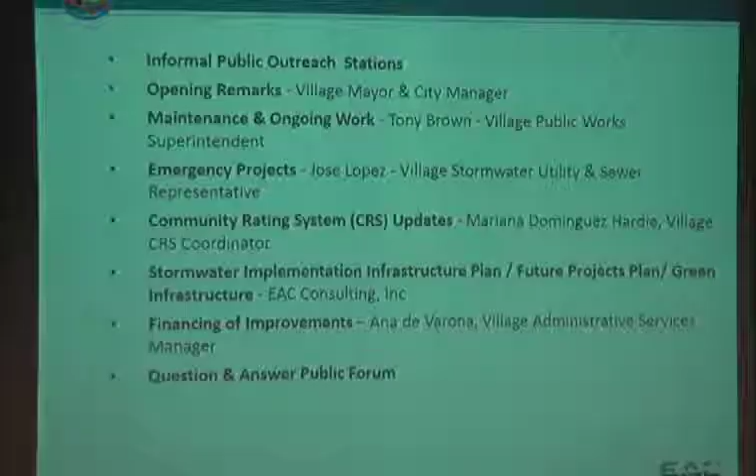I just want to discuss briefly with you some ongoing maintenance that we're doing to our drainage system and the entire village stormwater infrastructure. Our network of catch basins are interconnected, and at some point they either drain into a well or they exit through outfalls that go into the bay within the village stormwater infrastructure.

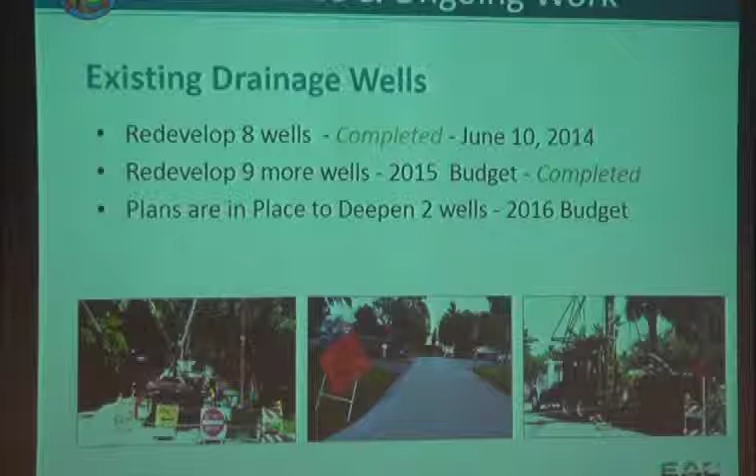In addition to the catch basins, we have a maintenance program that involves well cleaning, which is very critical because a lot of the rainwater during high intense rains goes into the wells, and then as an overflow, it also goes into the outfall. Last year we cleaned 8 wells, which was completed June 10th, 2014. This past year, we cleaned 9 more wells, which were also completed, and we will continue to clean wells every year. We also plan to deepen 2 wells, 3A and 3B, in the 2016 budget.

In addition to well cleaning, we also reline drainage pipes that have corrosion, infiltration, or joint separation. These photos here are pipe photos from the Ocean Lane Drive pipelining project. As you can see, the first photo there, let me see if I can get this pointer. Let me use this here. All right.

This here is a pipe on Ocean Lane Drive that had some corrosion, and there was also some water infiltration just from the groundwater. When this happens, it fills up our wet wells in our pump stations, and causes the pumps to come on prematurely to try to pump this type of water out. This is like a false reading, because this is not really rainwater, this is groundwater.

I just want to point out here what the pipe lining product is. It's a 3-part resin on a felt sheet. What happens is the pipe lining contractor pushes that through with steam, and the steam activates the resin, and it hardens that felt into what you see there. And that there will last forever.

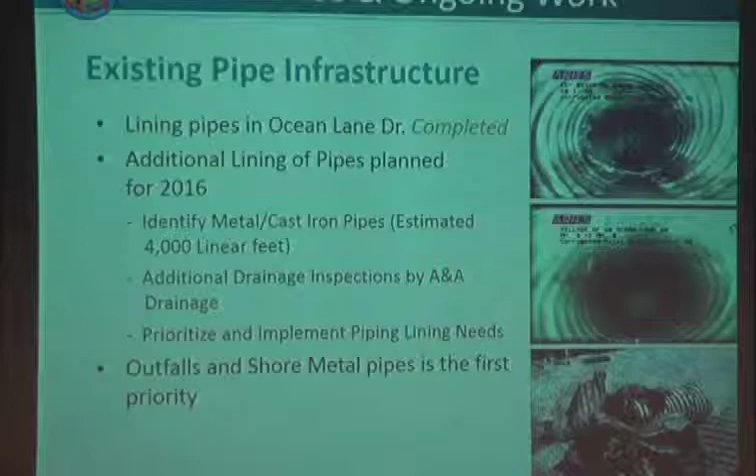And when that particular lining is put in, the existing external pipe can actually corrode and just disintegrate, and that lining will stay intact for hundreds of years.

So this is just another maintenance that we are performing on all of our pipes. Our first priority this year will be to line all the outfalls, which are corrugated metal pipes. Since they're so close to the salt water, we know that there's going to be some corrosion, so we're going to line those first this year.

After heavy rain events, inspections are performed to document flooding. The photos in this slide represent Sonesta Drive, and we've documented that there's water coming over from the adjacent property, which is Key Colony. They are working with us to inspect their wells and get them clean, because they must be able to maintain their water and not dump this water off into Sonesta Drive.

We have pumps that are connected to drains here, and after 2 hours or so, it drains it down. But if we didn't have this water coming over, our pumps would not have to work so hard. So we are working with them to secure this wall and to stop this water from coming over, by helping them discuss redeveloping their wells within their property limits.

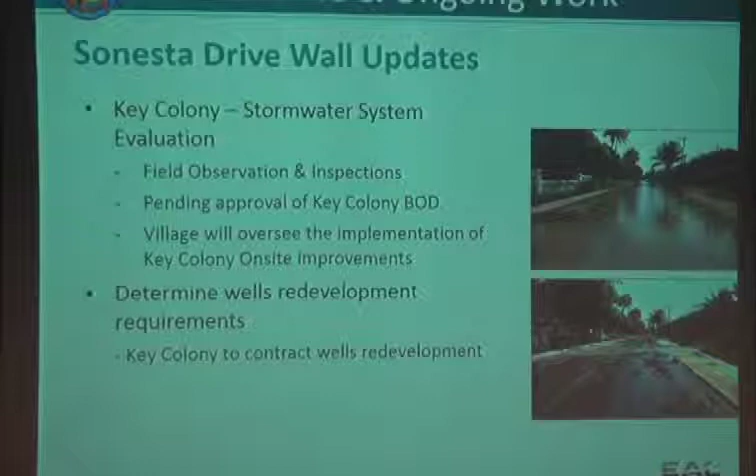Other improvements consist of the installation of a SCADA system at all pump stations. SCADA stands for Supervisory Control and Data Acquisition.

In the past, if our pumps were not operating properly, we would basically get a call from the police department saying there's a lot of flooding out here, something's wrong, and then I would have to wake up, drive over, and check the pumps. Now, this particular system will call me at 3 a.m., 2 a.m., whenever the pumps aren't working.

I think last week, or 2 weeks ago, the wet well alarm had sounded because we had a lot of rain and high tides. And the pump called me, and my wife was like, who is this calling you this time of night? It's a female voice, and it just said the wet well level is high. Pump 1 is working fine, and pump 2 is working fine also. So I said, see honey, it's just the pump station calling you. So, you know, I got a pass on that.

So this is just a proactive approach to ensuring that we are on top of the drainage situation and the flooding that we have here in the village.

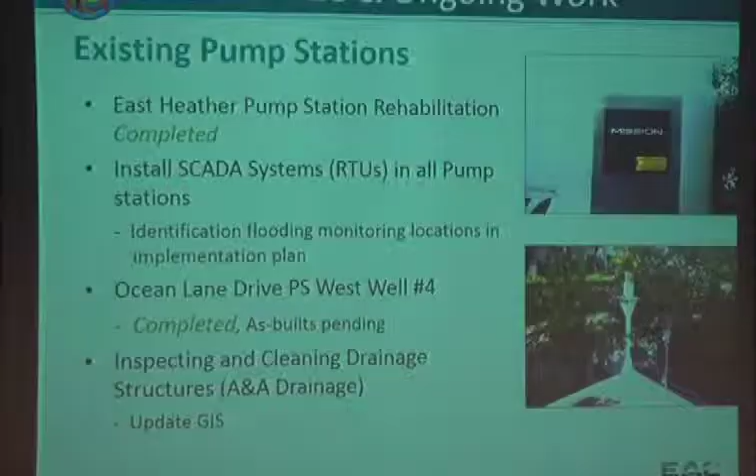That ends my short presentation, and I would like to introduce our stormwater owner's representative, engineer, Mr. Jose Lopez, who will be discussing the emergency projects that we have coming. Thank you.

Well, in February of 2014, we had our first workshop. We discussed the plans and the things we were going to do. One of the objectives was to do the emergency things we recognized as more critical right away, not wait for a complete planning process.

And that's what we are going to review here. We had identified several projects. One is the Harbor Point outfall enlargement, which we've been negotiating an easement for, so we haven't been able to do that work. But we have done the 260 Harbor Drive work. The outfall was relocated and redone.

This was caused by these outfalls collapsing as a result of corrosion of the metal pipes. And when I mean collapse, I mean collapse, the whole thing. I remember one of the property owners said it's a hole like that you could put a small Volkswagen in it, and it was. It was just that bad. But now we have a new line in 260 Harbor Drive, and we have a new line in 398 Harbor Drive.

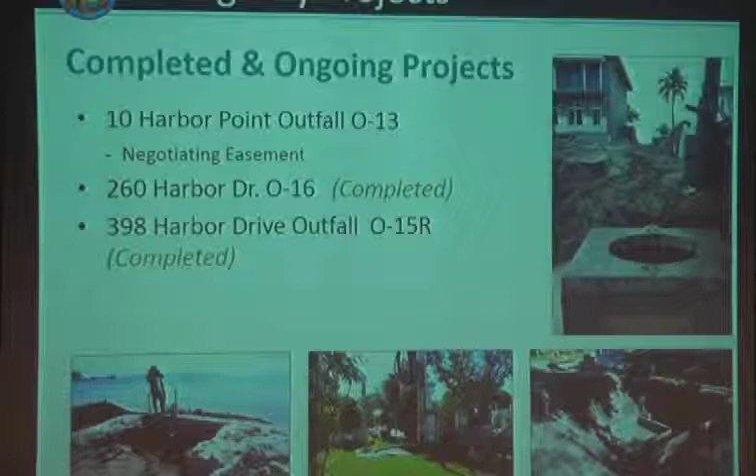They all serve the same basin, which gets a lot of flooding at West Heather, one of the lowest spots in the village, around 300 West Heather. So this was completed. Both works were completed. In fact, for the 398, we were able to get a grant for it. So it's work that has been done.

The other emergency work that was completed, done in the summer of this year, was improvements in the school area, the K-8 area. A lot of flooding has happened there, and because it's not only a flooding issue but a kids' safety issue, we wanted to have it in the emergency work, and this work has been completed. Two new wells were added to the area, and a backflow preventer was also installed. The problem is not totally solved, but we've already done some work on it.

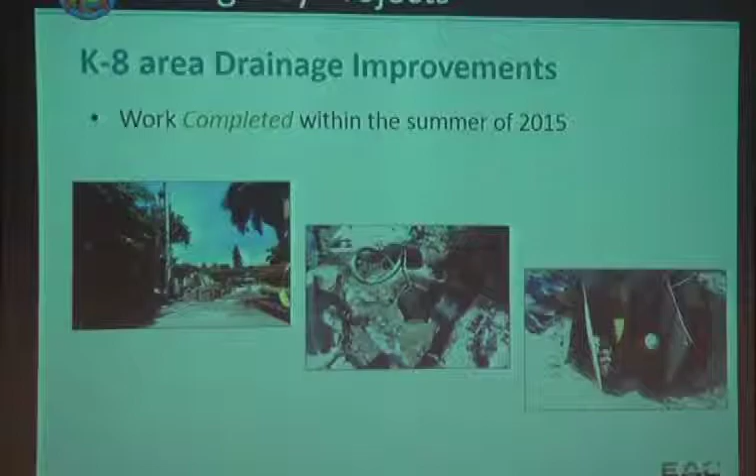And now the next presentation will be Mariana on the CRS updates.

Thank you, Jose. I'd like to start by defining what CRS is. It stands for Community Rating System. It's a voluntary program that the village chooses to participate in. We must meet a series of requirements, and in doing so, it benefits the community by providing a 15% discount on all flood insurance policies, commercial and residential, throughout the village.

One of the requirements of CRS is to make you aware and remind you that we are in a repetitive flood area, meaning we choose to live in a community with low elevations subject to flood. Drainage is subject to tides. I'm probably going to be the least liked person here today.

The first step in avoiding flooding is staging water in the streets and swales. Flooding, for the purpose of this presentation, means avoiding water entering your residence and affecting your private property. When there's a high tide, simply the water has nowhere to go. We just have to wait for the tide to change so water starts draining.

Jose and Tony did a wonderful job telling you all the projects that we have done. And again, I'm here to highlight that this will alleviate and mitigate a rainfall event, but any significant surges or storms, it won't be helpful in that situation. That's why we are in a mandatory evacuation zone when a storm does arise.

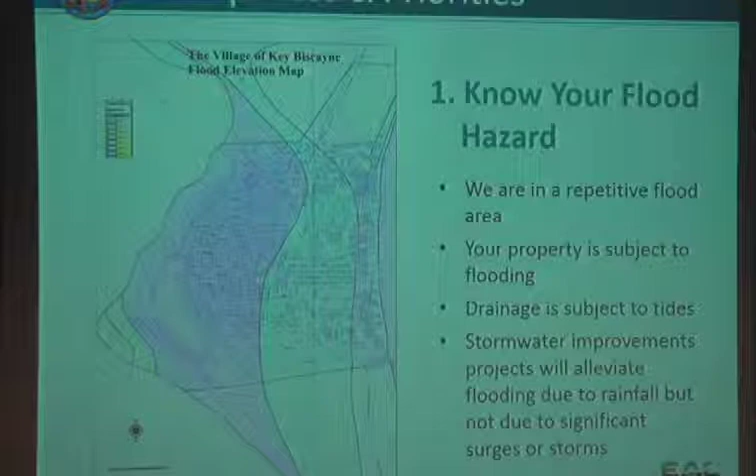Protect your property. We live in a flood zone. Again, you are required to have insurance. Even if you rent, we promote the importance of acquiring insurance. Most importantly, protect yourself. Turn around, don't drown. I learned that 6 inches of running water is sufficient to make you fall, and 2 feet will take your vehicle, even an SUV.

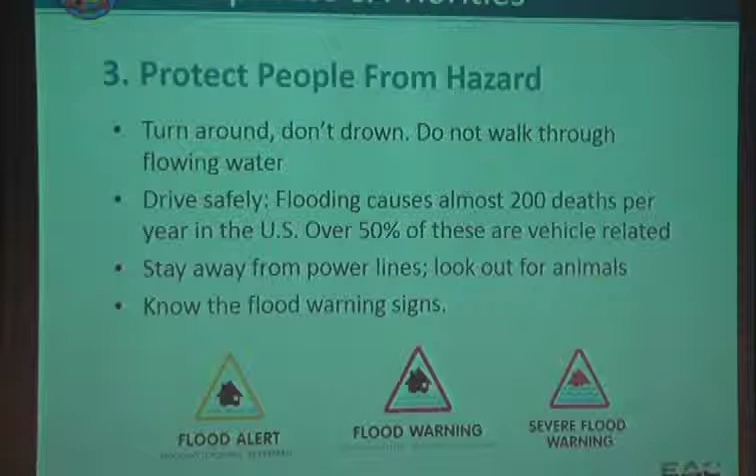So the purpose of this slide is just to be informed, be aware. Following are just simple tips on how to protect your property. And I must also direct you to a link, as a requirement of CRS, where you could obtain some information on grants. These grants offered are mainly to demolish and build a higher home above base flood elevation. Told you I was not going to be the most liked person here today.

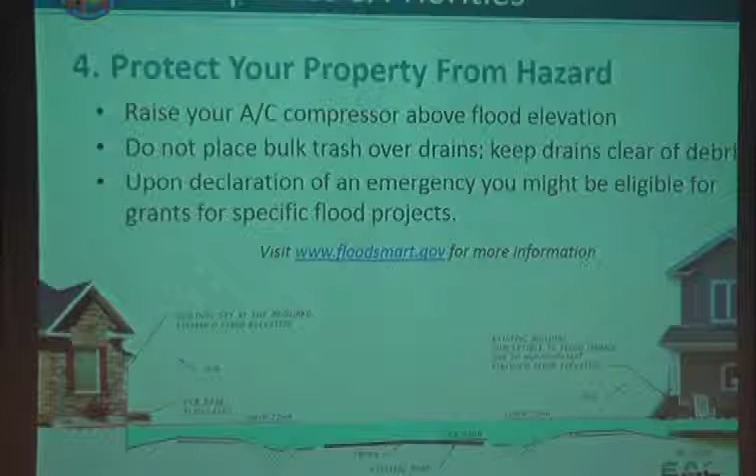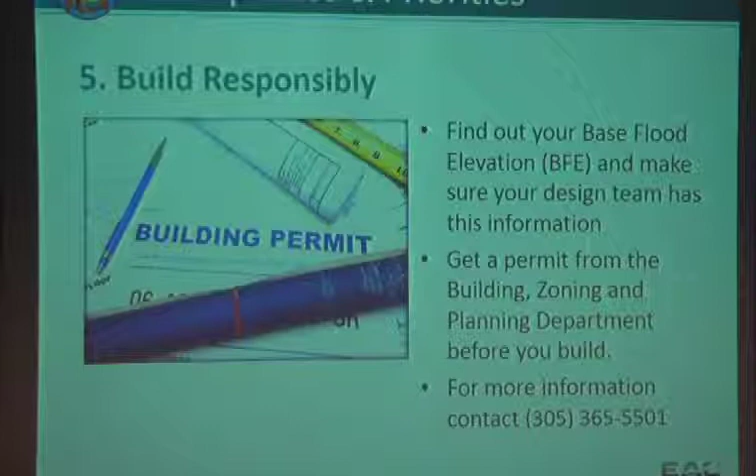Build responsibly by obtaining a permit. You're ensuring that you're meeting the code, and the work being done in your property will minimize any flooding.

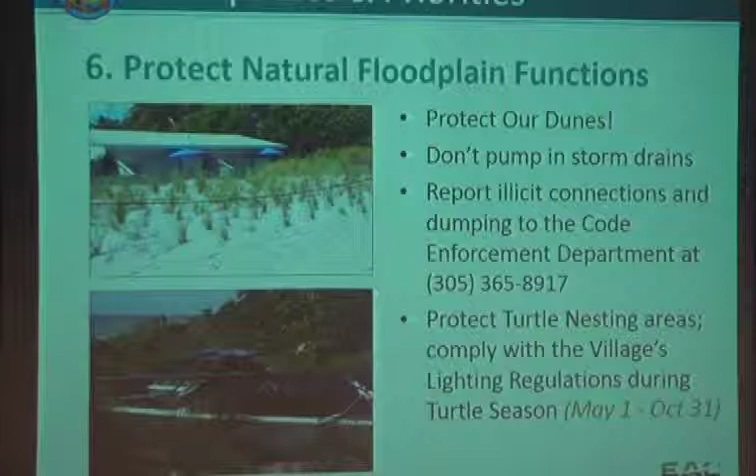With this, I conclude my presentation, and I leave you in good hands with Mike Adelphi. He is an engineer with EAC, orchestrating this workshop. Thank you. Thank you very much, Mariana.

I'm Mike Adifi, like Mariana said. I'm with EAC Consulting. I'm privileged to be the project manager on this great initiative that the village is embarking on. Really excited, but we're also grateful for the opportunity that the village has given us and has entrusted in us as a consultant team to handle this project.

Even though we're the consultants, I'll be remiss if I fail to mention the level of support and cooperation we have received from the village leadership, the mayor, the village manager, the stormwater representative, and all of public works staff. It's been very, very good. When you have a support team working with you on such initiatives, it makes things easy. So we're truly grateful for the opportunity, and you guys keep doing it.

You're doing a great job for the village, and some of the great work you've been doing that hasn't been noticed will start to get noticed with some of these improvements we're looking at. Like the mayor and the manager said, this is another step in the journey to start to effect the right infrastructure improvements village-wide.

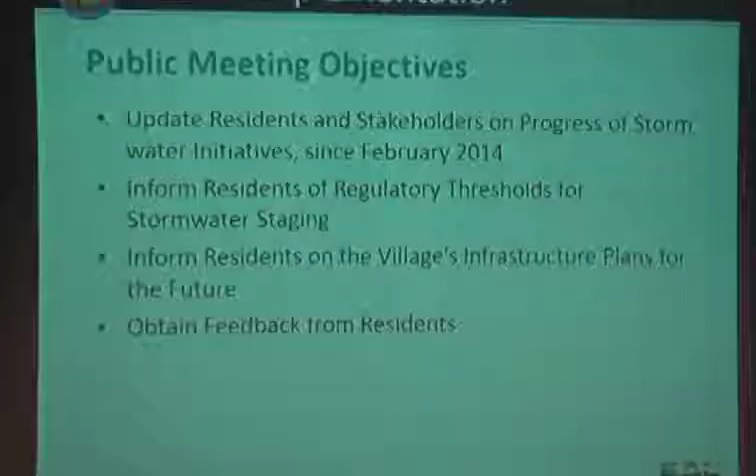This is the team. It's not EAC Consulting—it's the village, the residents, the leadership of the village, and us. We're going to work on this together, and we're going to successfully accomplish the goals that have been laid out by the leadership of the village.

So we've looked at this—there's no plan without a schedule. We can come up with the best plans, the most elaborate plans and schemes, but there has to be a timing to it. We've looked at the available budget, looked at the projects that are needed, and we've come up with a sensible plan over a time period that allows these improvements to be designed, permitted by the regulatory agencies, and constructed and put into service.

And so this is what we have. We have a starting date on this. Even though we've been working prior to this, we started this snapshot of the schedule by illustrating today's meeting, and then some of the other milestones we hope to accomplish through the process.

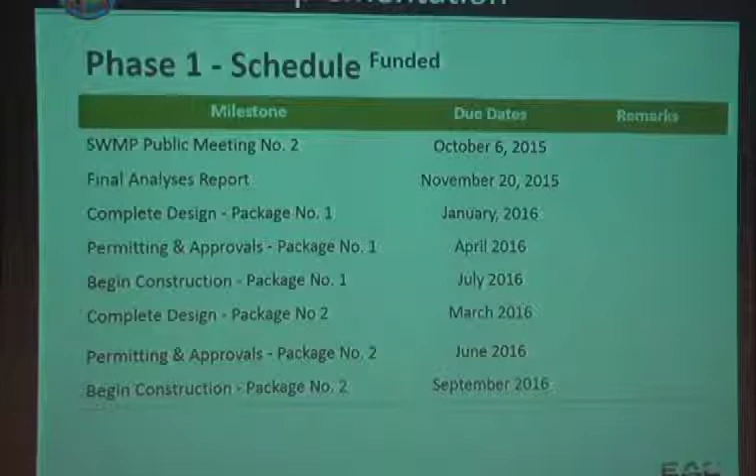There are two tables: a phase 1 schedule, as well as a phase 2 schedule, which is where future funding will be needed. There's some funding available right now. Now we're going to stretch the funding and accomplish as much as we can with that. But I know that the leadership of the village as well as the staff are looking at other alternatives and options to bring in needed funding to get some of the other improvements implemented.

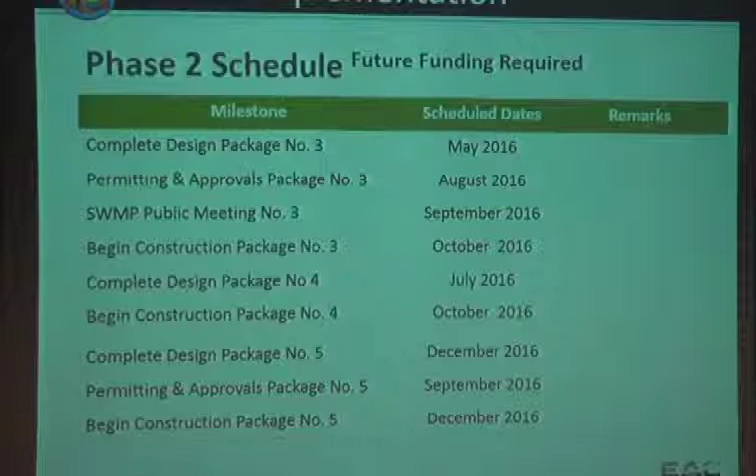I'm the leader of the team, but I'm surrounded by a great crop of professionals. I tell Jose when I come to the meetings that my guys have sent me to say things to you, but a lot of guys are working behind the scene, and some of them are here today. I want to recognize some of them, and they'll speak to you about some of the things we've been looking at.

First, I want to bring on Cesar Burgess. Cesar has been very much involved in the hydraulic analysis and modeling that has gone through this process, and he'll be able to share more insight on some of the things that we've done. Cesar.

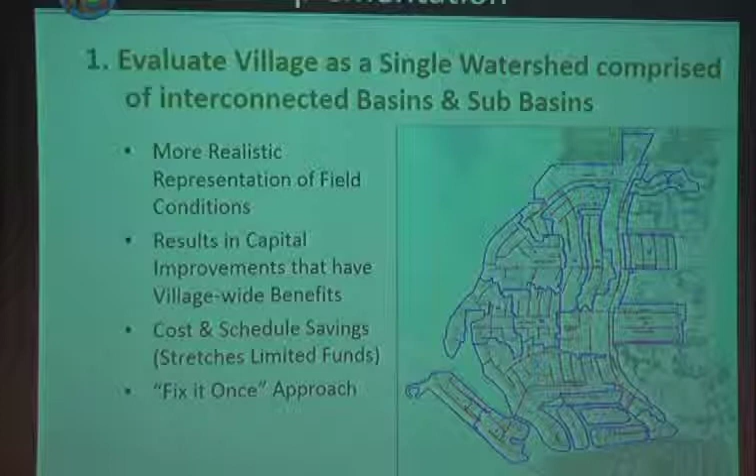Cesar Borges, Lucis Corporation. My area of expertise is stormwater management and modeling and analyzing systems to come up with a solution for the village.

So basically, what we started out with was the village had a master plan created in 2011, where they created a model, a mathematical model that represents the city systems, the area, so that you can analyze what's happening in the real world, but in a computer model. Since 2011, the village has been actively maintaining their systems, inspecting their systems, improving on the data collected in-house. So our process was: they have all this new data, let's go ahead and implement it into the model so we can get a more realistic representation of what's going on.

Part of this process involved updating certain components within the model so that we can get what's actively out there, what's been verified by hand, by feet on the ground, and have that implemented into the model. In addition, we incorporated some projects the village has completed since the 2011 completion of the Stormwater Master Plan. That's important because certain items weren't represented in the previous model since they were implemented after the plan was completed. So that's getting it up to date, getting our existing condition.

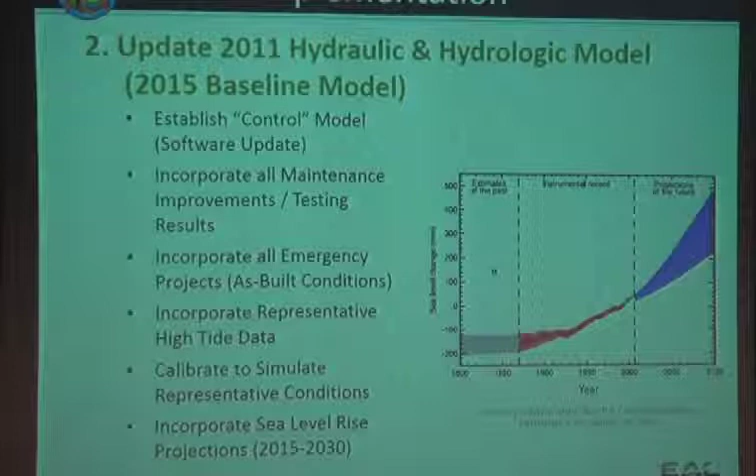In addition, we were looking at sea level rise, because it's a very hot topic. The village is very susceptible to sea level rise. It's something that cannot be ignored. We have actively implemented that component into our model, so that we can address future needs, not only today's needs but future needs of the village, so that we don't ignore something that might happen 10, 15 years down the road. You want to plan ahead. So sea level rise is one of those things, and they're projected up to about the year 2030.

With respect to our analysis, we looked at the overall staging of water on the village roadways and green areas, and so on. When you look at the model, the village has very low topographic elevations. What do I mean by that? The elevation of the roadway, the grass, the adjacent areas - it's very low relative to the tide, where all these waters are outfalling to. That's a bad thing. Without that elevation, water tends to stack up and end up as flooding on your roadways. And that means you need that much more force to push that water off the roadways, through the system, and out into the outfalls.

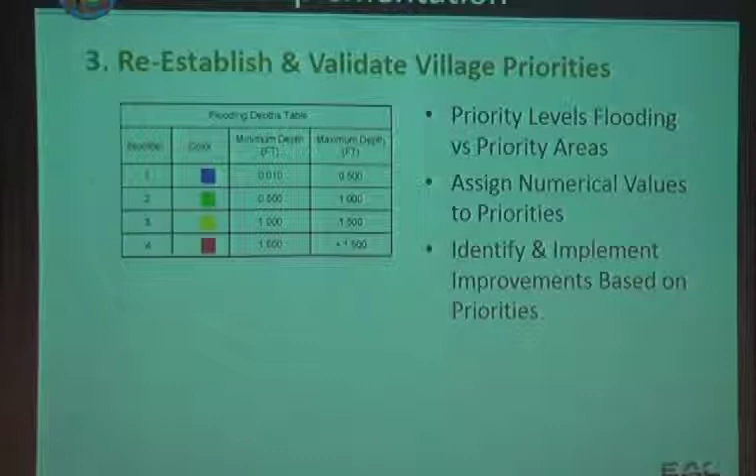So, wrapping this up as far as the hydraulic analysis: we looked at sea level rise, we looked at the outfalls, and the most recent data we have on the outfalls, updating that into the model. The new infrastructure has been put in, the items have been verified. We incorporated all of that into the model, as well as in our analysis for future conditions, where we put in proposed stormwater infrastructure to help alleviate the problems the village has with regards to flooding and staging.

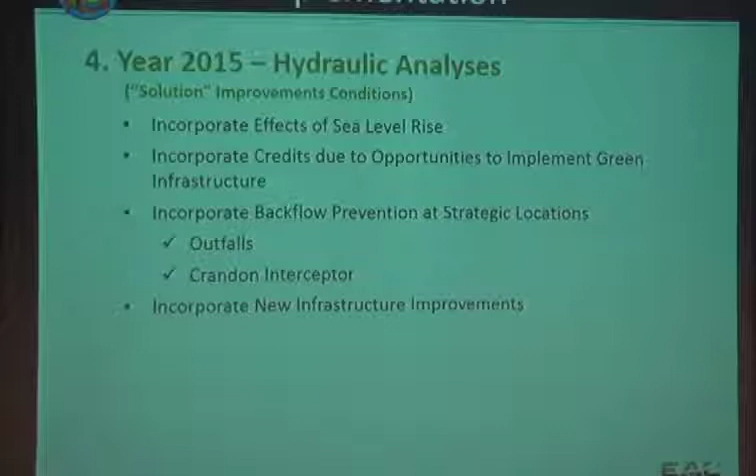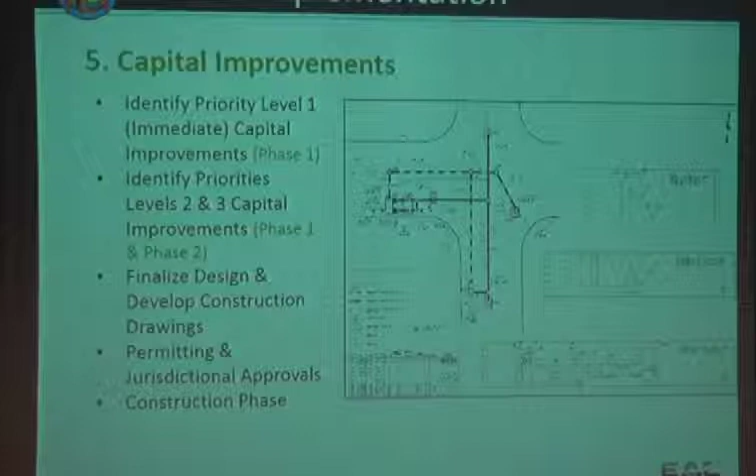So part of that included the priority level 1 and priority level 2 stormwater infrastructure improvements that one of my colleagues will be discussing a little bit later. We have to look at those as if they're finalized, so that we can assess their effectiveness on dealing with the stormwater management issues that are present on the island.

Now, in the media, recently, I don't know if you guys have heard that South Carolina had their 1,000-year event. It's kind of a misnomer in a way. People get it confused. They say that's something that happens only once in 1,000 years. It's not really once in 1,000 years. It's more of a probability. It's saying it has a 0.1% chance of happening. Like, for example, a 100-year event has a 1% chance of happening.

A 10-year event has a 10% chance of happening. A 5-year event has a 20% chance of happening. It's all percentage based. Now, with respect to the area that we're in, South Florida, it rains a lot. Our systems are taxed by the smallest rainfall event, but even a 5-year event, something that has a 20% probability of happening, you're talking about 8 inches of rain over a 72-hour period. That's a significant amount of rain.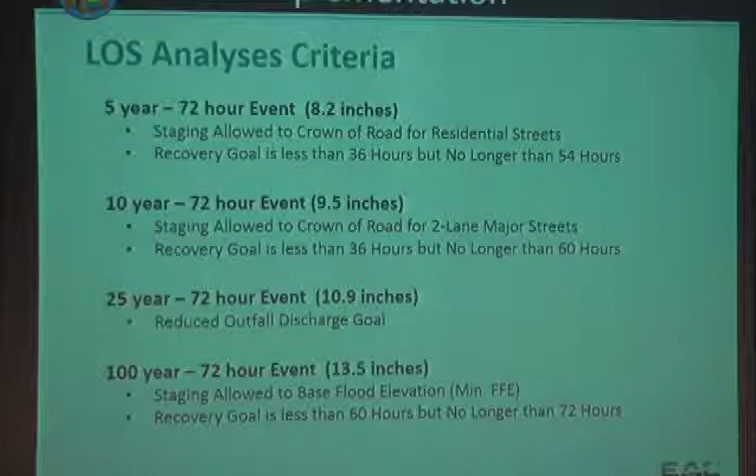So how do we design our systems? Well, we intentionally utilize swales, some of the roadway, the grassy areas to provide storage for stormwater so that the water doesn't go into your homes, which is the most important property that we have. You don't want it inside the home. It's okay if the grass gets flooded. It might flood for a day in an extreme event. But our intention is, when you have staging of water on these designed areas, that the water recedes in a short amount of time. So that's the way we design our system.

We design them to have some storage on the roadway, storage within the system, utilizing outfalls, pump stations, and wells, and not affecting the homes. And having those staged waters, those flooded waters, receding in a short period of time, so that you guys can go back to your normal daily lives. And that's the intent of the stormwater management systems.

And if you look at the slide over here, you see where it has the 100-year, 72-hour storm. That's the peak elevation that we want those waters to stage on the common areas. It can go right up to the finished floor elevation, but we don't want it to pass that elevation and go into your homes. That's the way the systems are designed. With respect to the smaller event storms, we're usually going to about the crown of road, and that's what we utilize as a break point, saying we don't want the stage to go above that. So we want to design our systems to the 5, maybe the 10-year events.

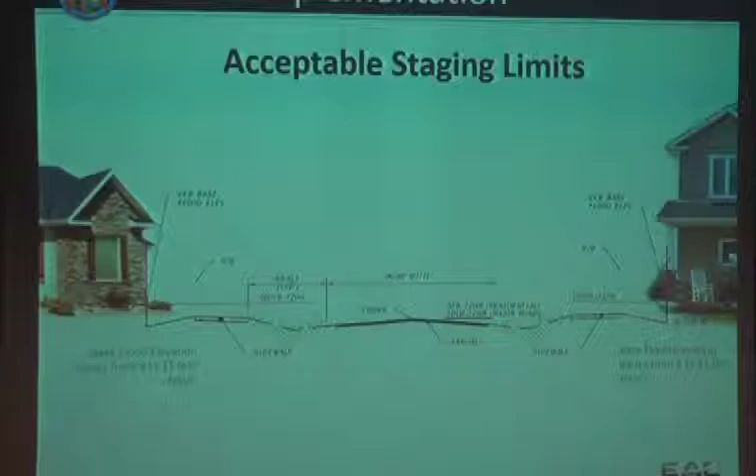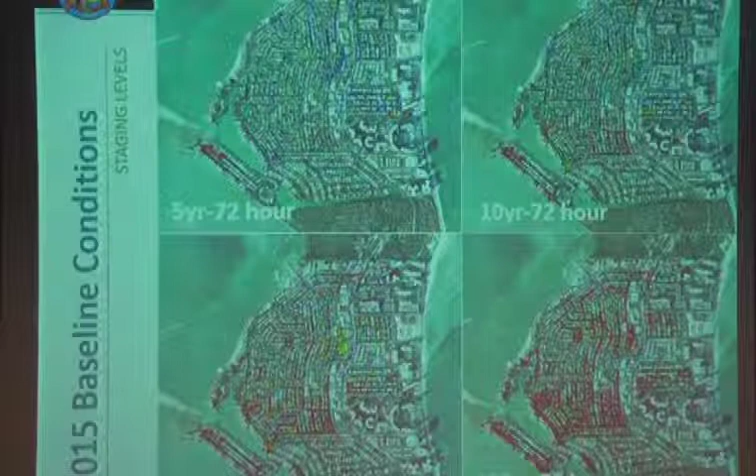And here's a slide, and you'll see it on the boards more closely, where you can see how the different storm events with their respective rainfall amounts result in additional flooding. Notice the reds in here. Now you start seeing the reds expanding in area. And as you get to the 100-year event, there's a lot of red, but just because there's a lot of red doesn't mean that it's necessarily going into the homes. If your home's built based off of the base flood elevation in an area, the inside of your home should be safe. It's just that the system, which is the whole island as a whole, is utilizing the areas for storage. So with that, I'd like to pass it on to Mark Kuntz.

Thank you, Cesar. Good evening, everybody. My name is Mark Kuntz. I'm a senior stormwater engineer. I work for EAC. I've been tasked with helping Mike arrive at some drainage solutions to some of the problems that you folks are experiencing here in the village.

What I wanted to do is go through a little bit of a summary of some of the different alternatives that emerged from the study that Cesar was talking about before. We've lumped the different improvements into different tiers, Tier 1 being the first level of protection that we're looking to implement.

Essentially, as Cesar mentioned, our greatest enemy is the ocean. We're working very diligently on solutions to help move stormwater off of the island and into the ocean. And clearly, in times like we've experienced the last month, which is the equinox high tide, you can see that you don't even have to worry about stormwater flooding the roadways. The ocean does a good enough job of it on its own.

So one of the first measures that we're investigating, and it's used pretty widely, is what they call backflow prevention devices. They're like little gates that we put on outfall pipes at the end of the stormwater systems to control the ocean water from coming in. In other words, the pressure of the stormwater, the water that comes on the roadway from the rain, will actually push the water out, but it will limit the amount of ocean water coming back in.

We feel that this Tier 1 approach is really the greatest solution that's going to bring the highest amount of relief for the lowest amount of money. There are currently 20 outfalls within the city and 3 additional outfalls into the Crandon Boulevard system. There are backflow prevention devices in place there, but for the vast majority of outfalls, there aren't backflow prevention devices yet. So our first recommendation is to construct the backflow prevention devices, at an estimated cost of about $500,000.

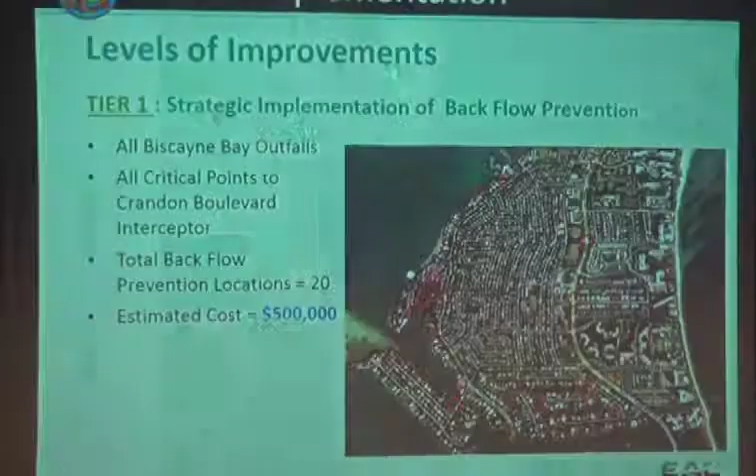Yeah, as this graphic demonstrates, and for those who can't see it clearly, afterwards you can take a look at the boards. The boards are essentially a duplicate of what you're looking at on the screen, but you can see the kind of relief that we anticipate in the reduction of red areas from just the installation of the backflow devices alone, without any other improvements, such as upsizing pipes, increasing the number of wells, or increasing pumps.

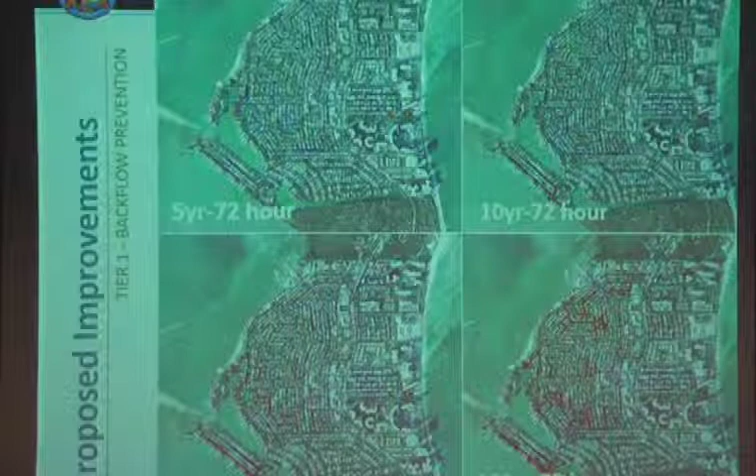After Tier 1, that brings us to Tier 2, which is addressing the flooding in the lower lying areas located within the village. Typically, this occurs on the eastern side of the key: Holiday Colony, area number 1, basin number 11, which is an area located south of Holiday Colony, and Ocean Lane Drive, which is located, of course, to the very north of the key.

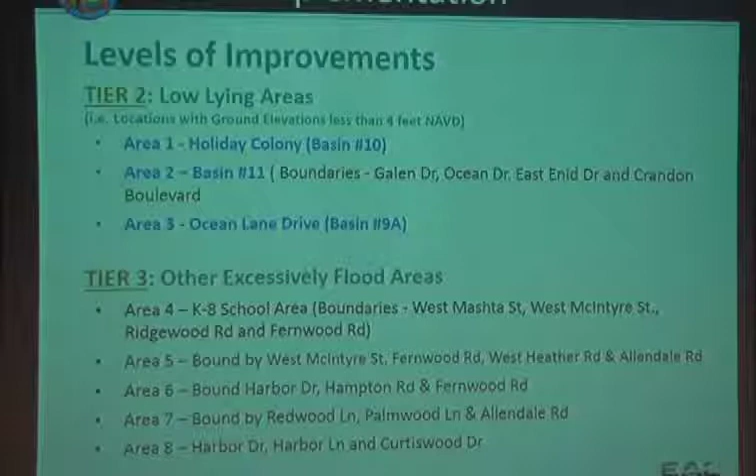I'll talk a little bit about what the proposed improvements are for those areas. Tier 2 essentially takes advantage of the funding that we know is available for the village right now. Tier 3 are improvements that we're going to investigate, but will likely have to be implemented as part of future funding. As I mentioned, I want to look specifically at each of the individual areas, the first of which is Holiday Colony.

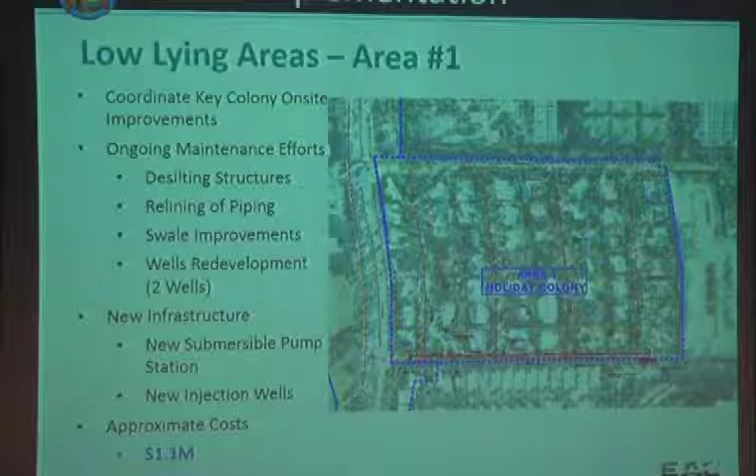Obviously, any stormwater solution involves ongoing maintenance. Tony spoke to you at length about the types of improvements that the village is looking at right now and actually implementing, including pipelining and the construction of additional wells. Those efforts will continue and are part of any ongoing solution. In addition, in this particular area, we're looking at the construction of a new submersible pump.

There is an existing pump station located in this basin. It's not working efficiently, so in order to address that, we're looking at the construction of a new pump and new injection wells, because obviously you have to pump the water someplace. So additional wells will be required. We estimate the construction costs for these improvements to be about $1.3 million.

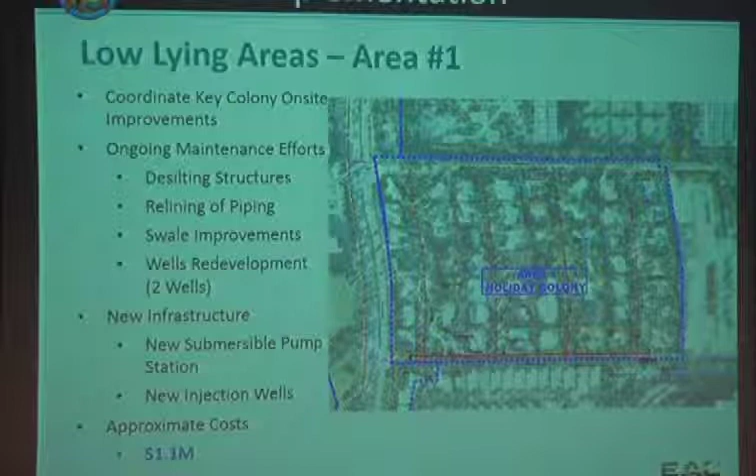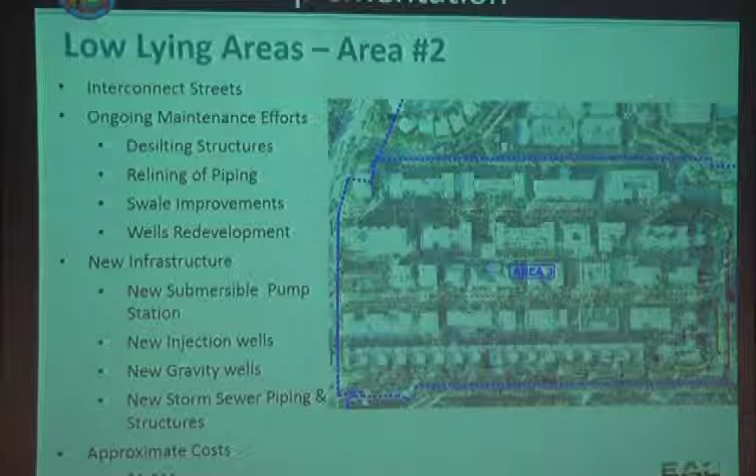The second area I'd like to discuss is what we refer to as Area 2. Unfortunately, I think the graphic says Area 3 in error. Again, this is located further to the south and east of Crandon. The preventative and ongoing maintenance efforts discussed by Tony also continue in this area. There is an existing stormwater system in this area, but it's not working to capacity. So as with Area 1, we're looking at the construction of a new submersible pump and wells, but we're also looking at augmenting and improving the existing stormwater system by increasing the size of some of the pipes to help conveyance, to help move the water over to the pumps.

The third area I'd like to discuss, of course, is located to the north, again also east of Crandon. As I mentioned previously, ongoing maintenance efforts will continue in this area. And the solution there is similar in that we're looking at a submersible pump and additional wells. We estimate construction cost to be about $1 million.

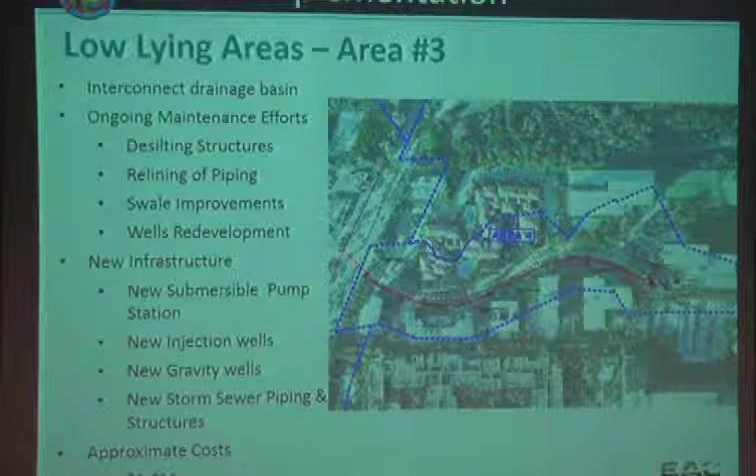And with that, I'd like to introduce Giorgio, who's going to talk to you a little bit more about stage monitoring and some other techniques that can be utilized to help improve quality within the village's stormwater system. Thank you, Mark. Good evening. My name is Giorgio Tachiev, and I'm with GAT Consulting. For this project, I provide expertise in sea level rise, groundwater, surface and groundwater modeling, and green infrastructure. So I'll be talking about these.

This slide presents our recommendation to install surface and groundwater level monitoring piezometers, so that we will know at any given point of time what the groundwater level or the surface water level is, and that will be important for future automation of the stormwater drainage system. As more pump stations are implemented, it will be important to know the groundwater and surface water levels, so that pump stations can be used in the most efficient way.

The other area which I will be supporting is the green infrastructure. There are two types of stormwater systems. One is the conventional stormwater system, which is designed to take the rainfall away from the developed area in the fastest way. This has two issues. First, it creates a load of stormwater downstream, and it also has an environmental impact because it takes away the water which typically infiltrates the ground, recharges the aquifer, and supports the vegetation. It takes it away from the watershed or the catchment.

Green infrastructure is something that, in the last 10 years, most cities have programs in, and the effects are basically two: environmental and financial. As an example, the city of New York publishes a report of green infrastructure impacts every year, and last year they reported more than $200 million of savings by implementing different green infrastructure techniques to manage stormwater on site.

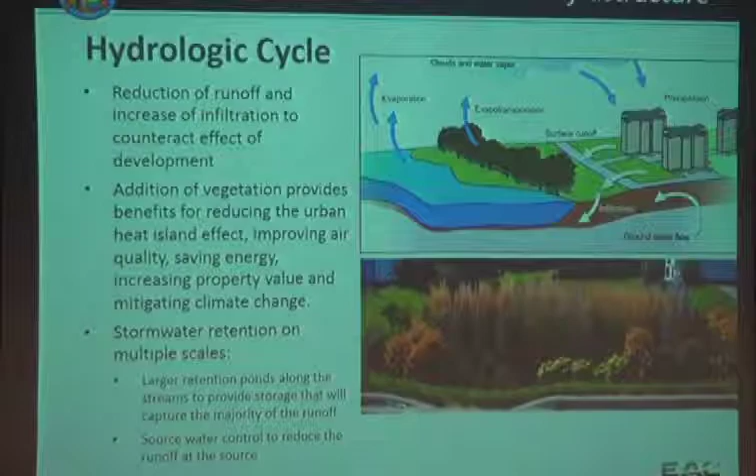For this project, we will not replace the entire system with green infrastructure, but we will be looking at opportunities to implement green infrastructure elements. In addition to being environmental and having a better financial performance, they also have a more aesthetic appearance. For example, I'll just give you

this is a typical rain garden. You can see the curbs and the curb inlet, and this is a land depression below the ground. When you have stormwater, it's intercepted, goes through the curb into the area, and it's stored there. This allows time to infiltrate. This is a temporary storage.

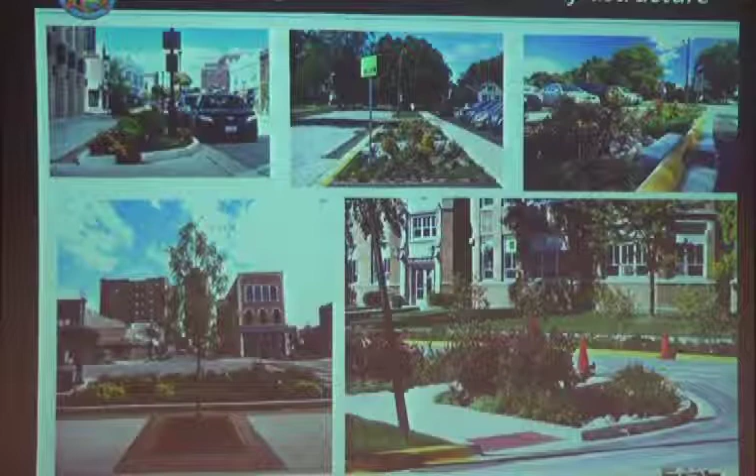This is a typical rain garden. Again, they're landscaped typically with native plants, which for Florida are important because they have to be able to survive for 6 months with water and without water. So these are examples that we will be looking into implementing.

The recommendations are to implement green infrastructure on all levels. From a property level, every owner can find different ways to implement green infrastructure, even cisterns for collecting water. To a neighborhood level, public green areas can be converted, if there is such opportunity, into larger rain gardens for storing water. The result of this will be environmental, financial, and also aesthetic. So that's my presentation. Next is Anna.

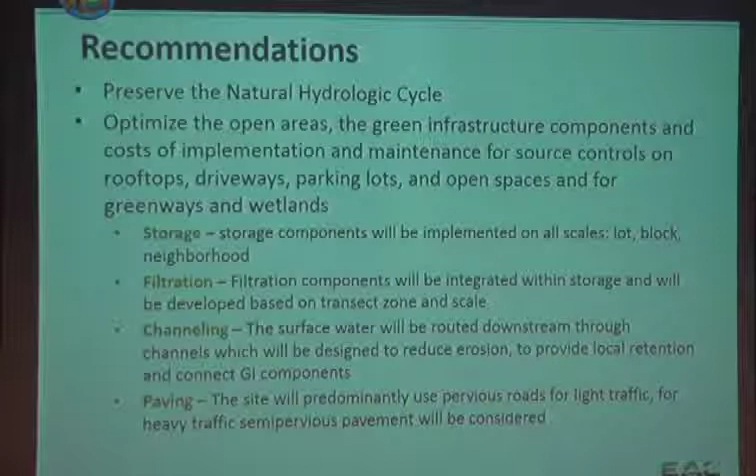Good evening. You've heard a lot of information tonight. You've heard about the maintenance that we perform on our system, our emergency projects, the future infrastructure plans. But none of these can be done without the most important part of the puzzle, which is the money. How are we going to fund this? I can't stress enough that everyone in the village benefits from the stormwater management program. Everyone does. That is why the single-family homes, the multi-family units, and the commercial properties all pay into the stormwater fee.

If you live in Kekana, for example, and you have to go get your prescription picked up at CVS, you're going to leave Kekana and go either by Crandon or Fernwood. So you're going to use the streets. Everyone uses them. The Stormwater Fund is an enterprise fund.

It is self-financed by the stormwater fees. As you can see, our budget for next year is about $980,000, but the majority of that goes to pay for debt service, and the remainder is our operating budget for the maintenance of the system.

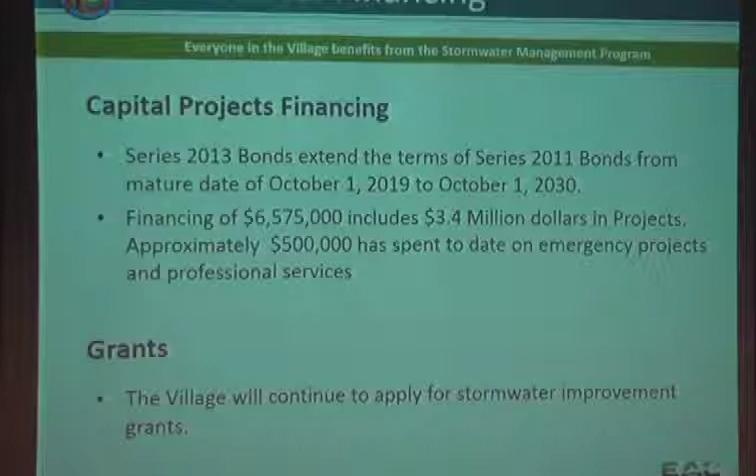So for future funding, what we're doing right now is looking for grants, and we have been successful in the past. In the years that we've been here, we've received about $900,000 throughout the years. So we feel confident that we will be able to continue to apply for grants and hopefully be successful in receiving some of those, so we can put that money back into the pot and be able to do all these projects.

So we also have a problem at the end of Sunset, and it floods continuously. I showed pictures that it was flooded in April, and it also flooded in October, but it floods throughout. It just seems to stay longer during the month of October and April for some reason. So I was wondering if this project included Sunset, because I noticed Curtiswood and Harbor and Hampton Lane, though I'm not sure exactly where that is.

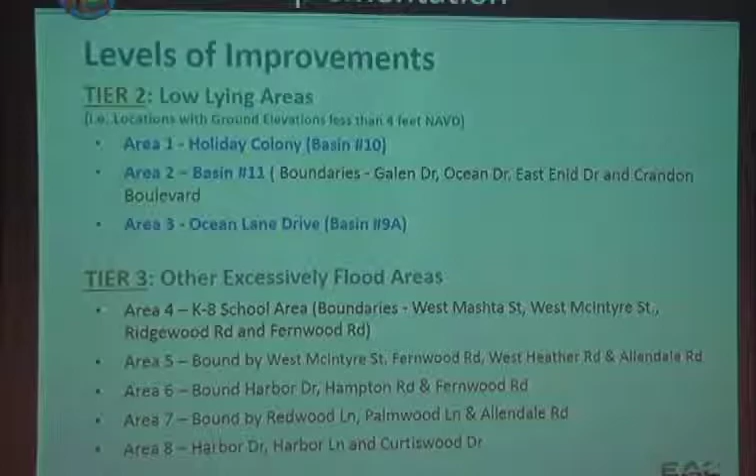What we've done is identified, like Caesar and Mark alluded to, the areas where the most flooding is occurring right now. You may be experiencing some flooding, but the first wave of improvements may be addressing those issues, and that's why you don't see a major infrastructure undertaking identified here. As mentioned before, when we implement the backflow systems, you get significant improvement in some areas on the west side. We've looked closely at those low elevation areas taking a lot of staging of water right now. The village continues its normal routine maintenance and repair improvements. If there are specific locations with issues in the existing infrastructure, Public Works will be willing to look at and address them immediately.

If I can comment real quick, we did receive Mrs. Young's complaint form for flooding, and we've documented some photos. We want to wait until the next rain event to measure how well it's draining. We have a 72-hour criteria, and if there's an initial rain of 1 inch within an hour, that will give you a lot of water, but if it goes down within a day, then the drainage system is assumed to be working properly. However, two weeks ago we had king tides, higher than normal, and the water was coming back into the system. I believe that was the reason for the continual water sitting within the drains. But we will be analyzing your situation and I'll be contacting you with the results.